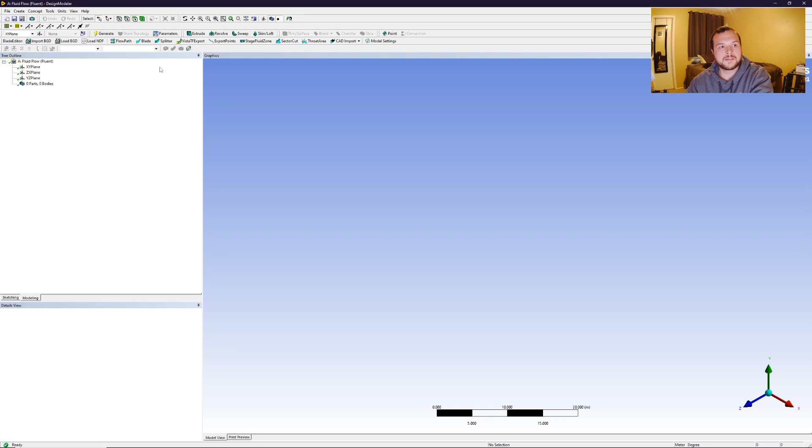And since it's a 2D flow, we're going to go into our XY plane. So we're going to start with a giant rectangle. And so I'm going to dimension this top line as 40 meters, and then the height of the rectangle as 20 meters. And then now I'm going to take a construction point, put it on my line, then add a midpoint constraint from here to that line, and now we have that point at the center of the line.

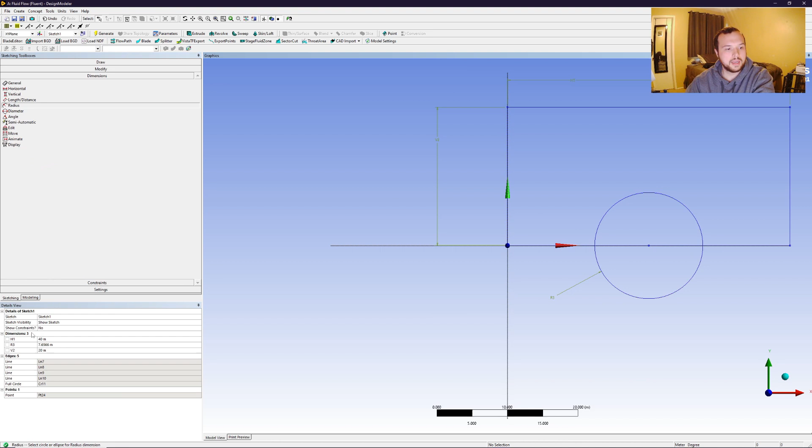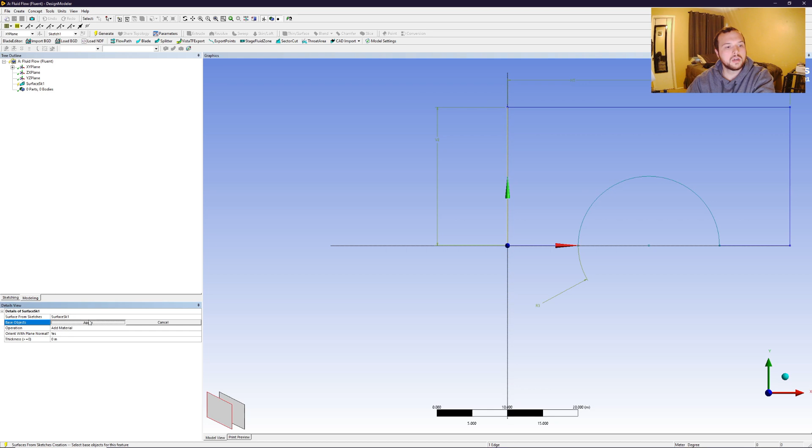Next, what we're going to do is make this circle, and then we're going to give it the radius of 10 meters, as is in the handout. And then the final part to finish the geometry is trim this bottom portion and then these side pieces here. So now we're going to go to Concept, Surfaces from Sketches. We're going to choose this, Apply, and Generate. And now we have our semicircle model.

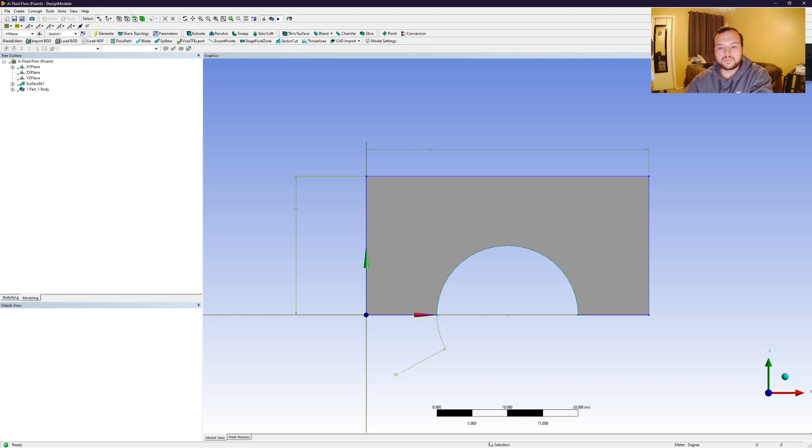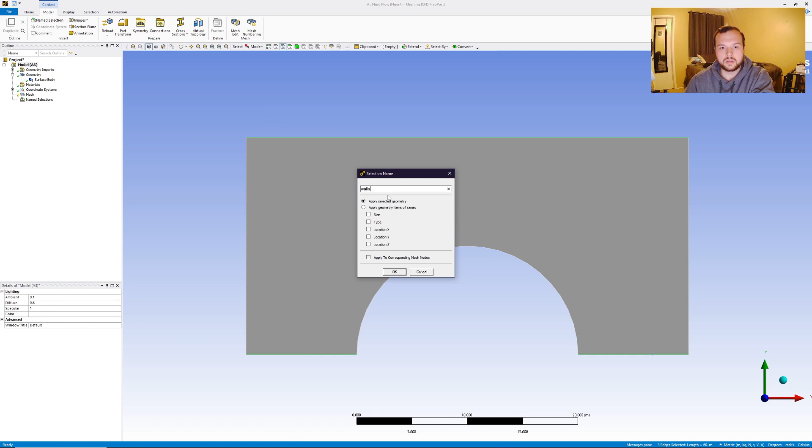Next, we're going to go into Workbench and we're going to begin the meshing phase. Again, we're going to go back to 2D, and the first thing we're going to do is start by creating named selections. We'll call this semicircle. We'll call this the inlet, and then the pressure outlet, and then these last three will just be walls. And there we are, we have the beginning of that.

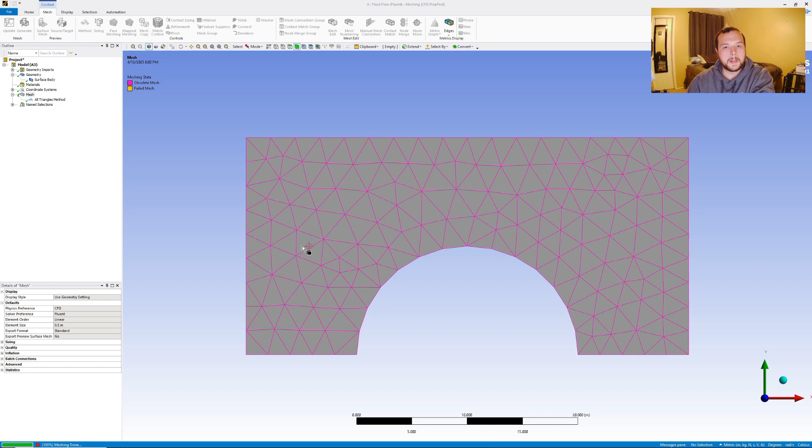Next thing we're going to do is insert a mesh, apply it, and now we're going to begin using triangles, and we will generate that. Next, we're going to change the element size. For this, we will do 0.5 just for the sake of time. In my actual one, I did 0.15. And then we're going to generate. And now we've got kind of small ones here.

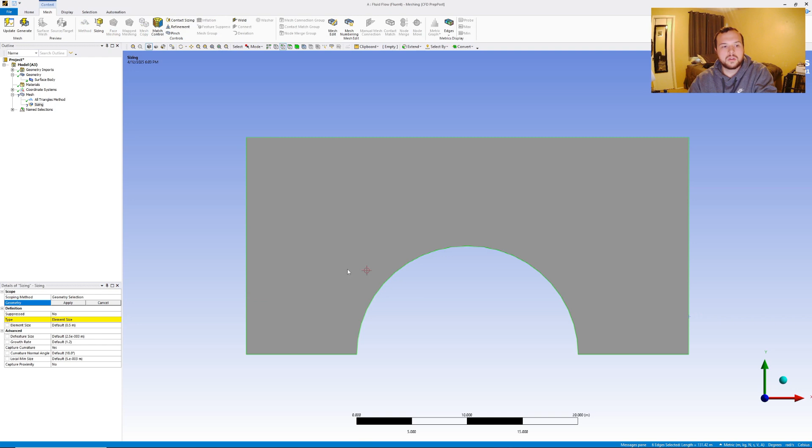The next step, what we're going to do is right click, insert, and we're going to do sizing, and then we're going to choose edges to size. All of these exterior edges we're going to size, and we'll change that to like 0.25, and then we will generate.

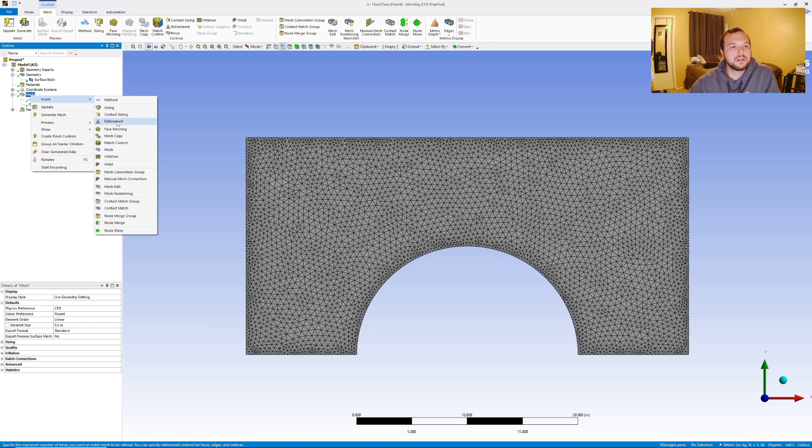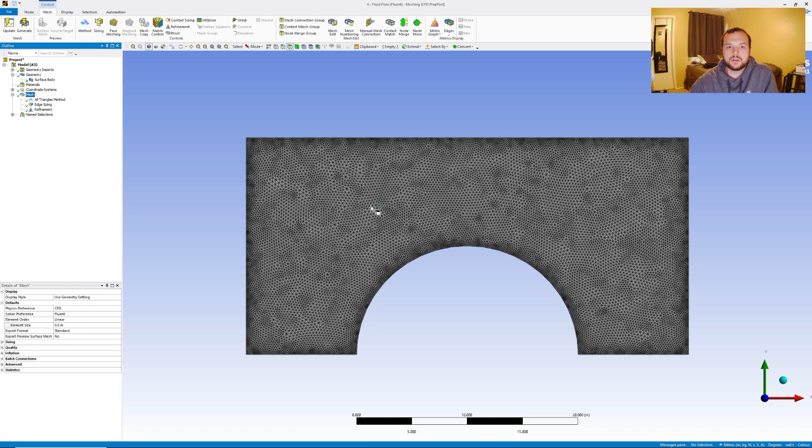And then the final thing we're going to do is insert a refinement along the total geometry here, and then generate. So now we have a much smaller, nicer mesh here. So now we're going to go back to Workbench, update our mesh, update our downstream, and begin the solution setup. I use double precision and 2 solver processes. You can do single and 1 solver process, or any sort of way you'd like to do it.

So now we're going to set the model. I'm going to show the inviscid case first, and the process for the viscid model will be exactly the same. It's just changing a couple more settings, and I'll show that towards the end. By the handout we are given, the free stream velocity is going to be 25 meters per second. So we're going to go to boundary conditions and change that to 25. The outlet, we're not going to do anything but prevent reverse flow.

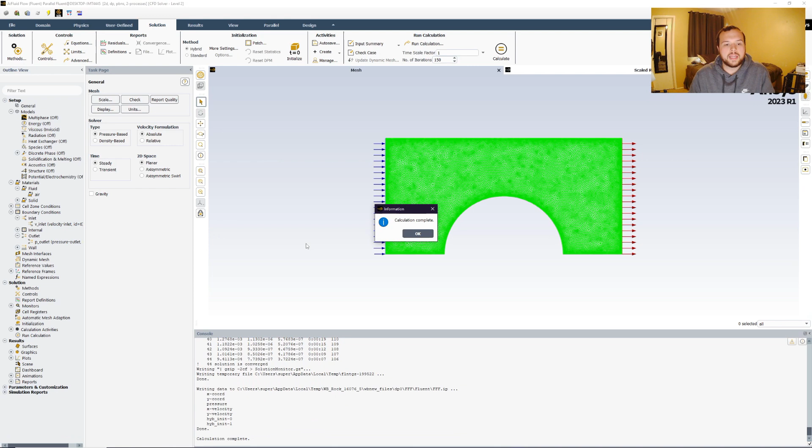Alright, we'll see that it has converged. So, the first step is we're going to get our contours. So, I'm going to start with the velocity contours, and we're going to leave everything open there, and change that. And so this is the velocity contours for the inviscid flow over the semicircle.

You would do this same process for the pressure, so we'll just go and change this. We'll just do a new contour here, and we'll call this pressure, and we'll show the dynamic pressure for this one. So this is the dynamic pressure, and then again, you know, we want static pressure, we go to static pressure. We want total pressure, we'll go to total pressure, and all of that.

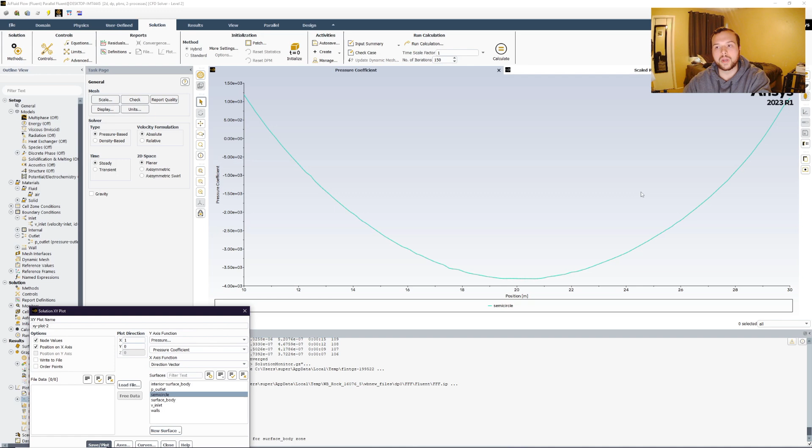Now we're going to do the exact same thing for the pressure coefficient. So pressure, this drop down, pressure coefficient across a semicircle, and again, now we have what looks like the opposite, right? So remember, for an inviscid flow, it should be bound between 1 and -3. Of course, it's close, but it's not exact. That could just be the computational errors and cutoffs and rounding. But overall, the shape is what's most important here, in that it starts at one point and then returns back to that point in an inviscid case.

Now, finally, what we're going to do is get the drag coefficient and lift coefficient. So we're going to go to the left under Results, under Reports, Forces, Edit, right-click. So it's important to know, of course, drag is only in the x direction. So x equals 1, that's your drag and drag coefficient. Y equals 1, x equals 0, that's your lift coefficient.

So we'll start by showing the drag coefficient. And so now we'll see down here we have our pressure drag, and remember, it's inviscid, so there is no viscous drag. And then this is the total pressure. And then same thing over here is the coefficients. So your drag coefficient due to the pressure is here. Again, 0 viscous, and then your total over on the right. So this would be your drag coefficient.

However, these are not always correct, so it's best to take your total forces here and then manually non-dimensionalize them in Excel or anything like that, which is just taking the force and dividing it by the dynamic pressure. So now I'll show the lift coefficient. Same thing. Again, inviscid, so we only have pressure, 0 viscous, your total lift, and then the coefficients that go along with those. Again, it's better to non-dimensionalize them yourself rather than taking these coefficients, because these are not correct.

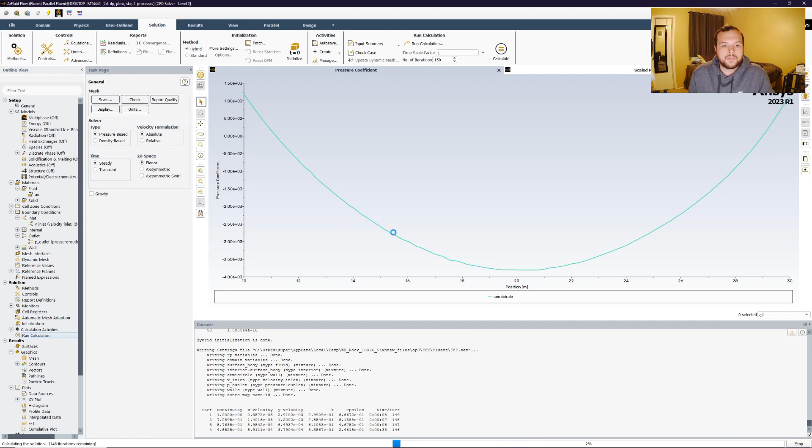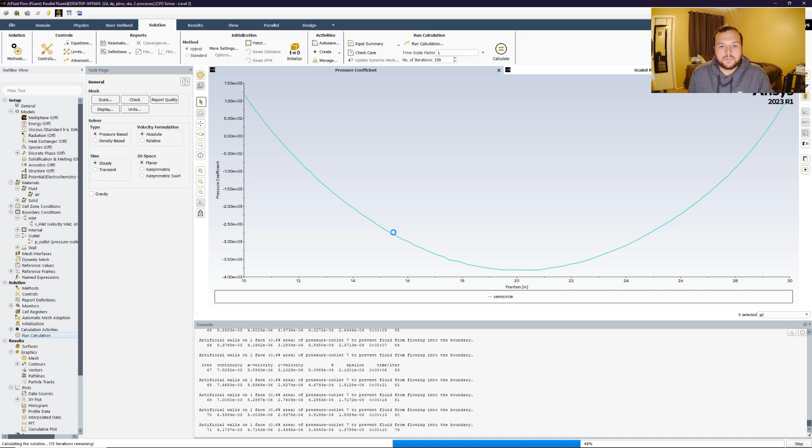So that is basically the entirety of part 3. However, when we go to change the model to a turbulent model, we're going to use K epsilon, and we're going to do enhanced wall treatment. Then we're going to hit OK. And then nothing else has changed. We can just go ahead and rerun, initialize and calculate. Alright, and our solution is converged.

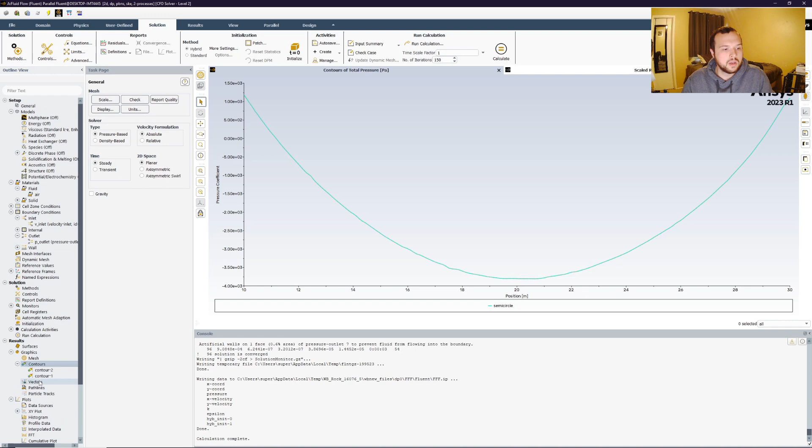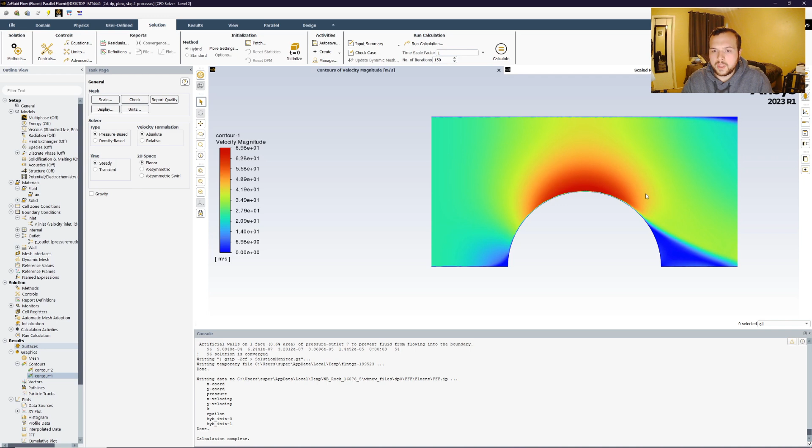And again, just to show the differences, we'll go to the first contour here. So this is the velocity, right? So again, it's viscous, so the no-slip treatment is there, which is highlighted when you see that blue going across the line. And then the formation of that wake region back behind here. And if we pay attention to the top, you see a kind of a boundary layer forming. So the procedure is exactly the same, and that's how you do part 3 for the project.